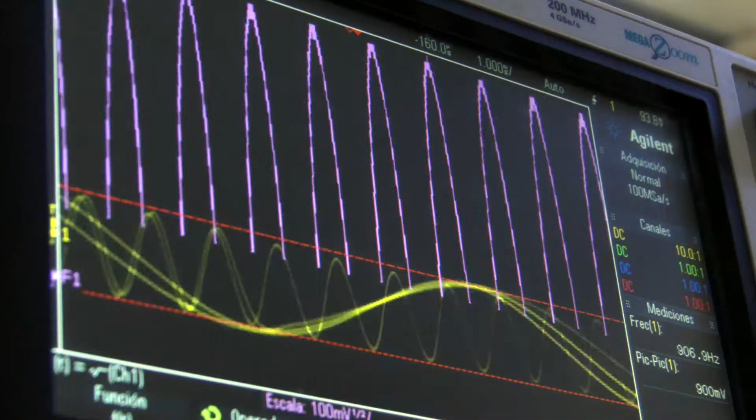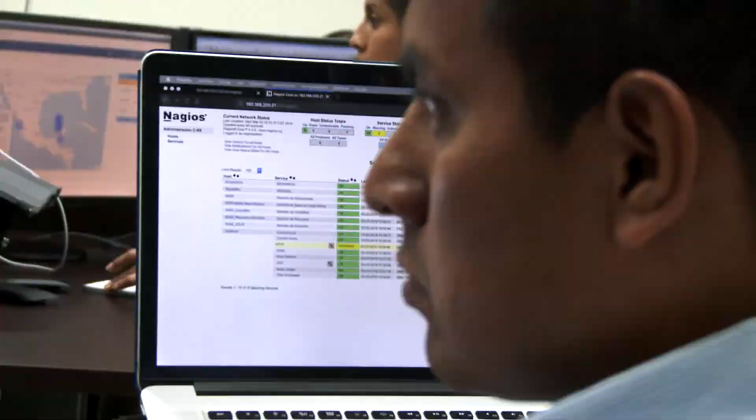INIDETAM, Science and Technology at the Service of the Homeland.

The Mexican Navy, in the field of its attributions and with the vision of diminishing technological foreign dependence and of projecting itself as a vanguard institution, carries out scientific research activities through the Research and Technological Development Institute of the Mexican Navy, INIDETAM.

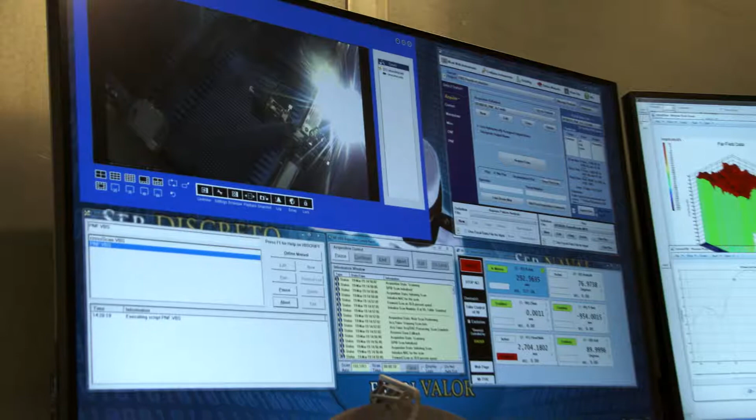Created on September 16, 2001, and located in the naval facilities of Antón Lizardo, Veracruz, the Institute's mission is to conduct research and development projects on its own or in coordination with other institutions, either with its own resources or those from the Sectorial Fund for Research and Development in Naval Sciences, in which there is a participation of the National Council for Science and Technology, CONACYT, in order to support force, unit, and naval establishment operations.

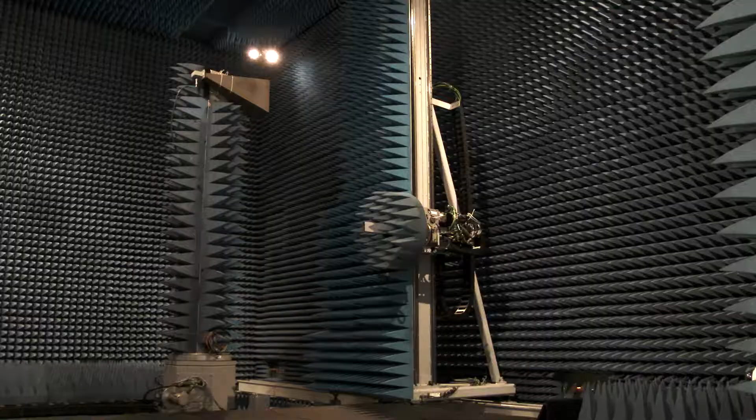In order to fulfill its mission and vision, INIDETAM has the following main functions: training and updating, relationship and partnership, research, development and integration, replica production, technical support, and administration and organization.

INIDETAM counts on highly qualified personnel holding PhD degrees, master degrees, and engineering BA. They are specialized in knowledge areas like computer sciences and informatics, modeling, simulation and virtual environments, electronics and control, mechatronics and instrumentation, engineering in aeronautics, communications, signal processing, applied physics and optics, and cyberspace.

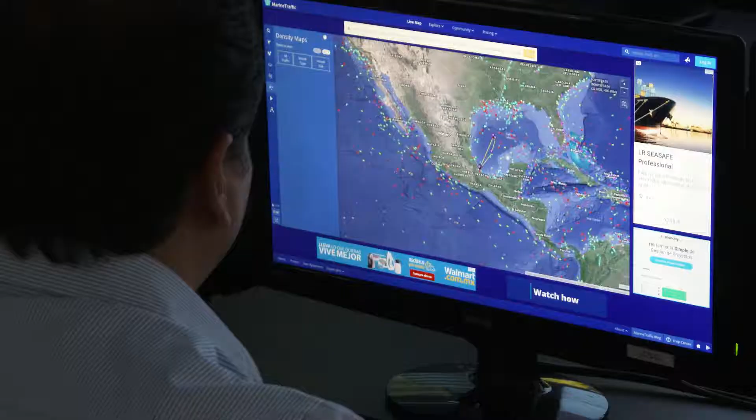In the innovation process for the generation and search of new technologies, research, development, and integration, these functions won't be carried out properly without the presence of highly qualified human resources and the support from other subject matter specialized centers. It is here where substantial training and updating functions become relevant, and relationship and partnership allows INIDETAM to work with different national and foreign institutions to keep and increase its capabilities.

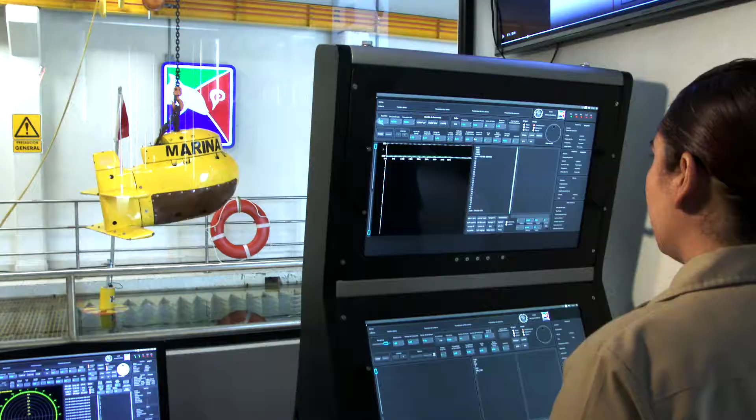That's why the Mexican Navy has signed several cooperation agreements for research and development with prestigious national and international universities and educational centers, like the National Council for Science and Technology, CONACYT, the National Autonomous University, the National Polytechnical Institute, the Autonomous University of Nuevo León, the Veracruzana University, the National Institute of Astrophysics, Optics, and Electronics, among others.

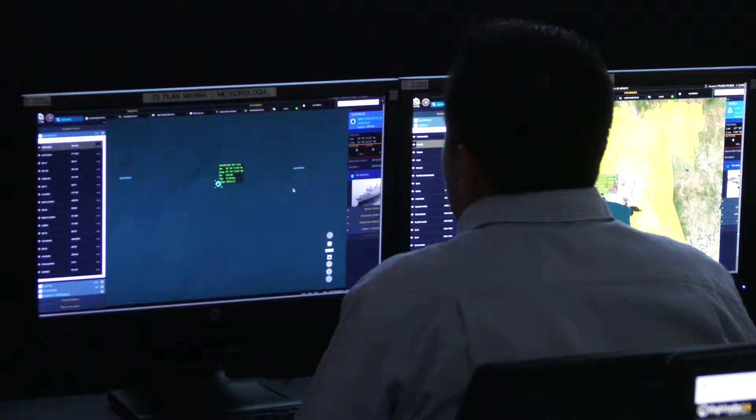Also, there is a close relationship with different national educational institutions so that their students can carry out internships, entrepreneurship semesters, academic stays, and lectures by CONACYT members in the different areas or projects developed at this institute.

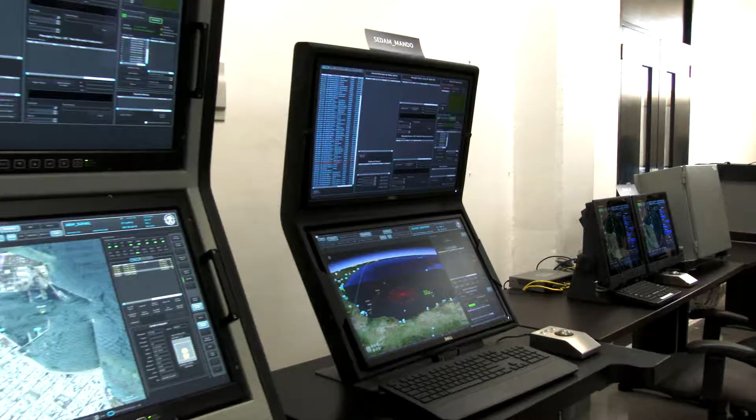The following projects are currently under development: Mexican Navy Data Link System, SEDAM. It is a system with the capability of sharing a common operational panorama and exchanging tactical information of interest for optimizing decision-making. Digitalization of the control and monitoring system of ship propulsion plant, DCCOM.

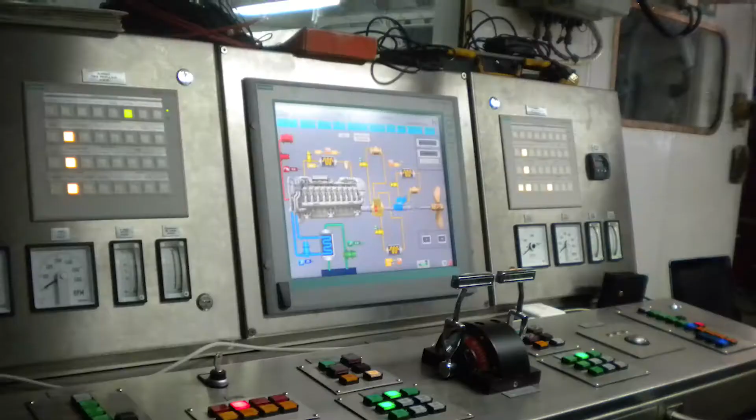DCCOM is a system that allows controlling and monitoring of the propulsion gear in the Mexican Navy surface units, within safe operation parameters as well as the monitoring of secondary functions.

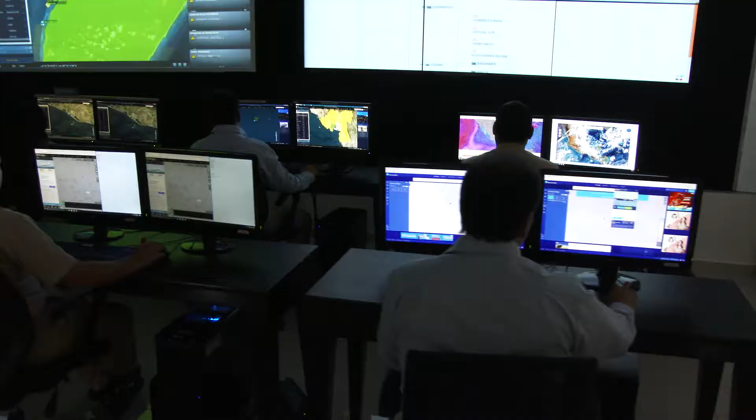Command and Control System of the Mexican Navy, CICAM. System aimed at processing the information, controlling and providing follow-up to naval operations, as well as the visualization in real time of the common operational panorama.

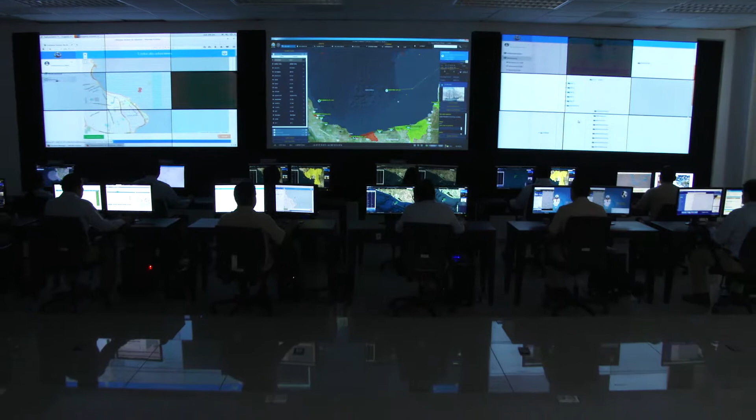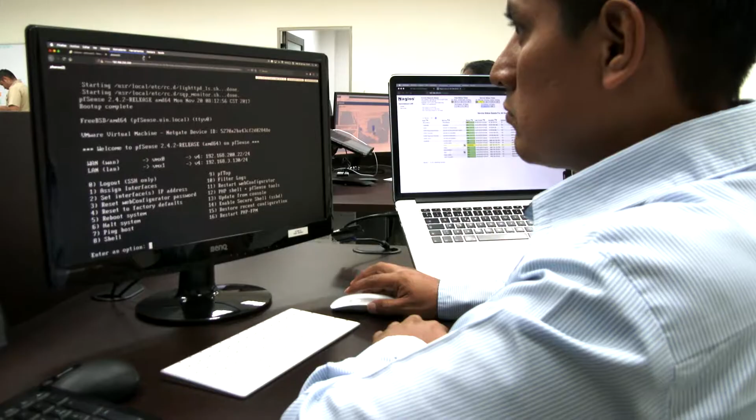Intelligence System of the Mexican Navy, CIAM. Computing platform for the intelligence system of the Mexican Navy, whose purpose is the optimization of the processes involved within the naval intelligence cycle by means of information analysis tools interconnected to an institutional database.

Unmanned Aerial System for Vertical Takeoff and Landing, SAND-DAF. The objective of this project is the design, manufacture, integration, and testing of an unmanned aerial system capable of carrying out vertical takeoffs and landings.

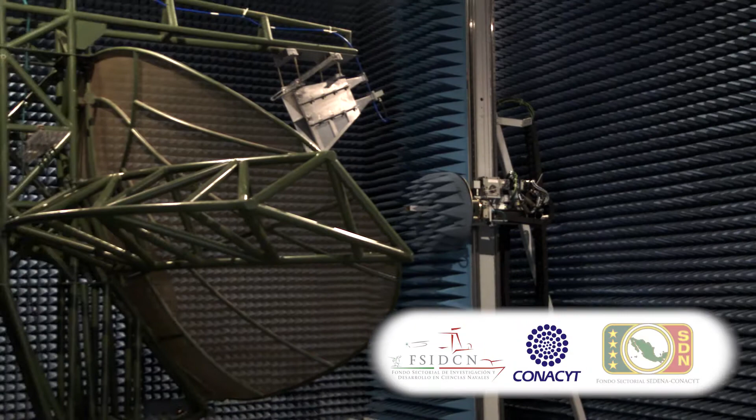Air Surveillance Radar, SINACAN. Air surveillance radar based on functional prototypes in 3 dimensions: bearing, distance, and altitude.

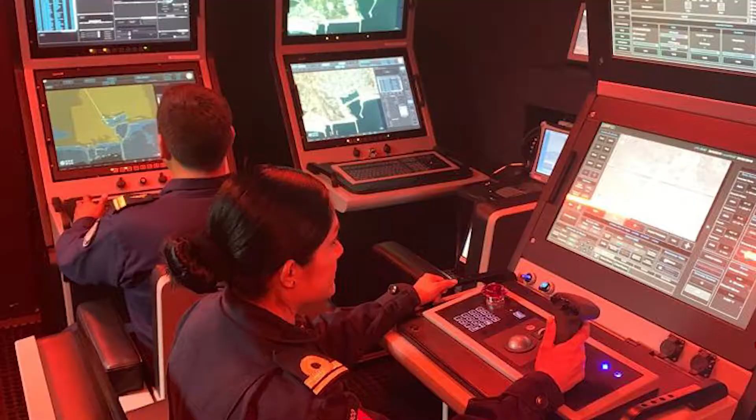Optoelectronic Shooting Control System, Garfio 3.0. It consists of a shooting control system for naval guns Bofors caliber 57mm Mk3 installed on board of Mexican Navy's oceanic patrols. Completed projects: Mexican Navy Autonomous Patrolling System of Aerial Tactical Reconnaissance, SPARTAM.

The SPARTAM project is aimed at designing, developing, and integrating UAS as for counting on a system for gathering intelligence information to strengthen ISR capabilities and provide support to all the operations carried out by the Naval Intelligence Unit.

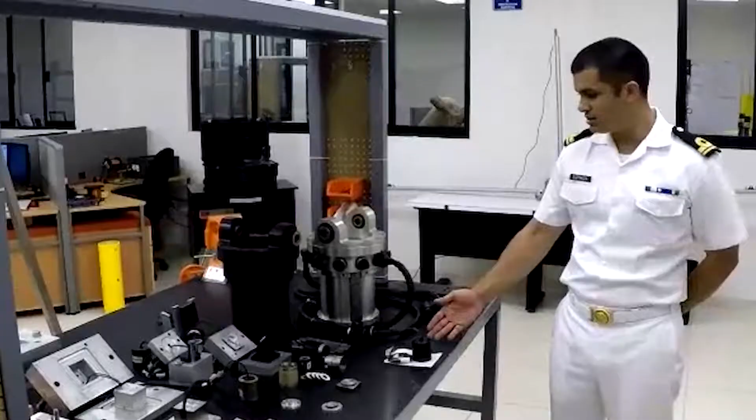Maritime Surveillance with Sonar System, SIVISO. System formed by both a variable depth sonar and sound buoys aimed at providing ocean patrols with subaquatic detection capabilities. This project reached remarkable achievements in the areas of acoustics, signal processing, electronics, and mechanics.

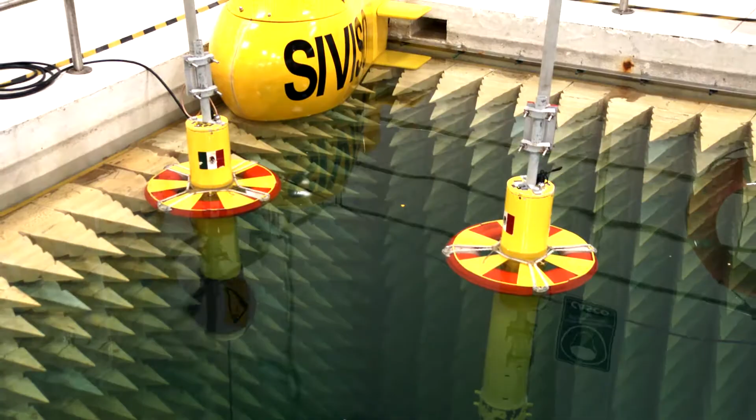As a result of this, there is now a maritime surveillance system formed by 4 types of sonars: portable sonar, passive sound buoy, active sound buoy, and variable depth sonar, all of which are integrated in a portable container and provide ocean patrols with the aforementioned capabilities.

Training Center for the Command and Control System of the Mexican Navy, CECISCAM. Center created with the objective of training and preparing personnel in the operation and maintenance of data link, command and control, and ISR systems. 2 main simulation systems were considered within this project.

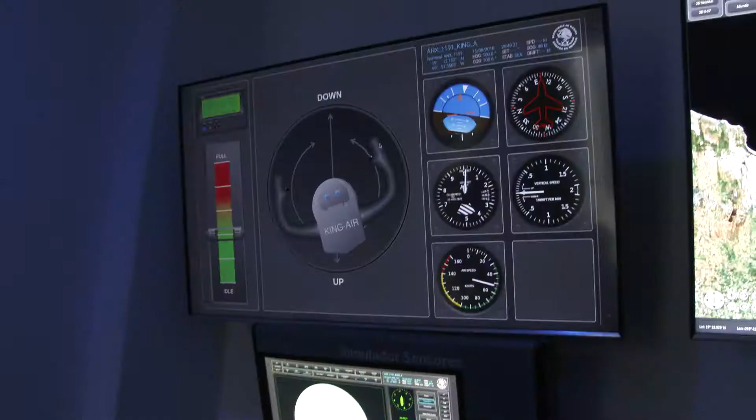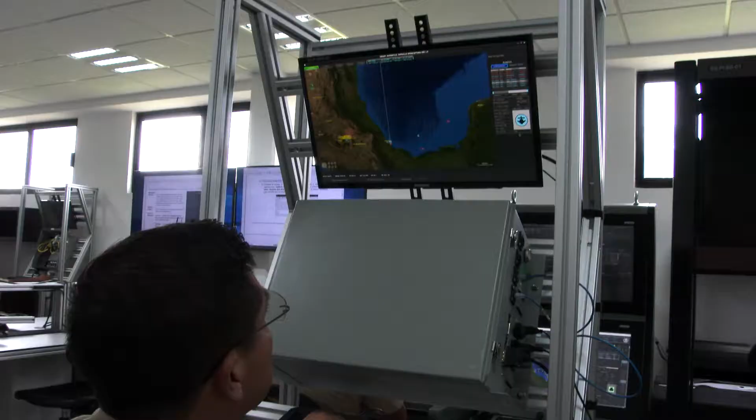The first one is an operation simulator which counted with 10 cabins, 8 of which for the simulation of surface, aerial, and terrestrial operational units. 1 more aimed at the simulation of a naval command room, and the last one for simulating the Mexican Navy ISR Operations Center. The second simulation system corresponds to a simulation of data link systems, which in turn integrates 6 stations from SEDAM.

And a failure generation system from which instructors may enter the most common failures that could be met in a SEDAM system.

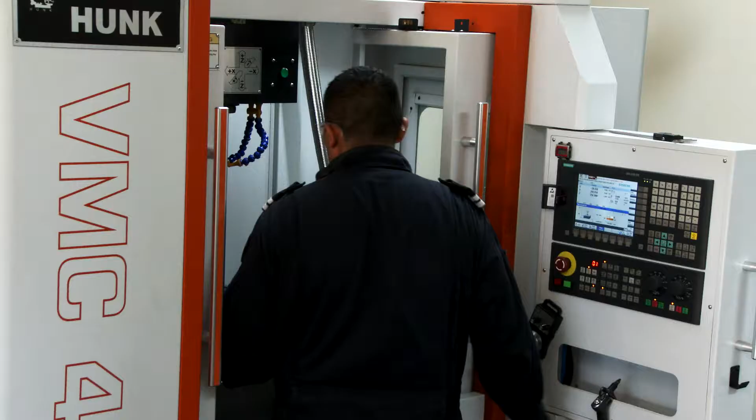Development of an aerodynamically stable body of free flight, propelled by a solid fuel, BV-01. The general objective of this project was the development of an aerodynamically stable 70mm diameter and a meter-long prototype, aluminum body and a graphite nozzle that could be launched from a testing platform, counting on an up to 10-kilometer free flight propelled by medium-energy solid fuel.

Along with the prototypes, software and hardware are designed, built, and integrated in a set of subsystems for a prototype rocket for its tactical use in the Mexican Navy.

Virtual Shooting Range, CATVIR. This system consists of a simulator that leads to a training of naval personnel in the use of organic armament. It provides the users with shooting scenarios against fixed targets, bullseye, reaction shooting, and movable target shooting, all of this by means of 3D scenarios and IR lasers.

One of the first projects from INIDETAM, installed in 5 units from the Mexican Navy.

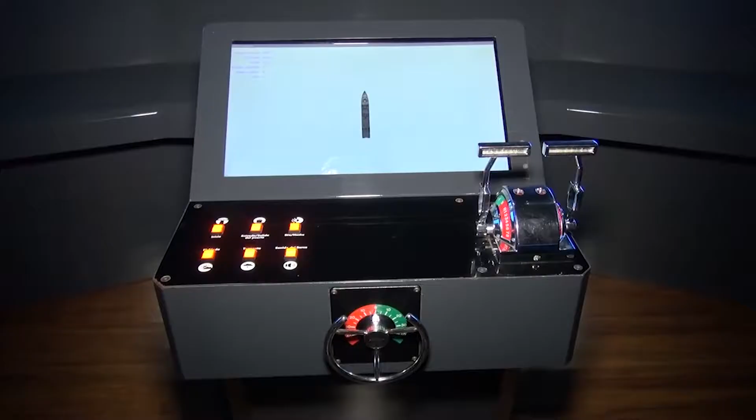Navigation Simulator for Naval Museums in Veracruz and Puerto Vallarta, SIPNAVMUS 1 and 2. Navigation simulators of ludic use that lead visitors to naval museums to feel the experience of commanding a Mexican Navy vessel as if they were entering to or leaving from the ports of Veracruz and Puerto Vallarta, Jalisco.

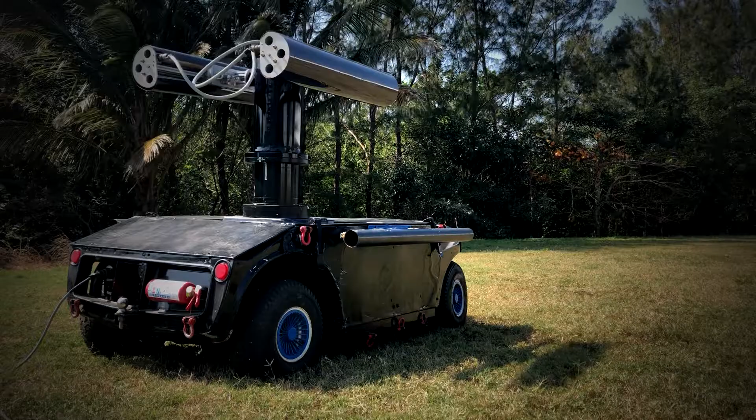By this means, the Research and Technological Development Institute of the Mexican Navy seeks to be a leader in the national scientific arena, capable of diminishing foreign technological dependency and to present the Mexican Navy as a cutting-edge institution in the use of national technology, with the only objective of working for Mexico.

INIDETAM, Science and Technology at the service of the homeland.